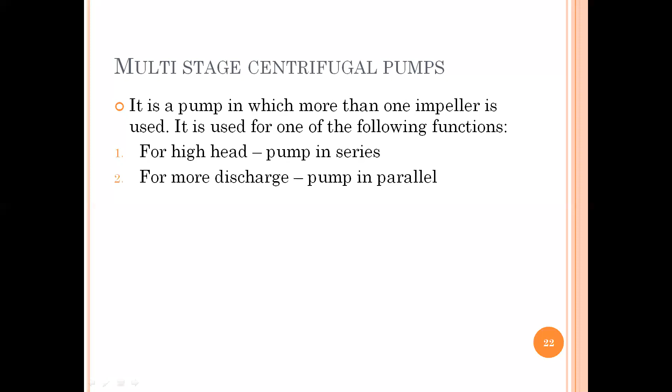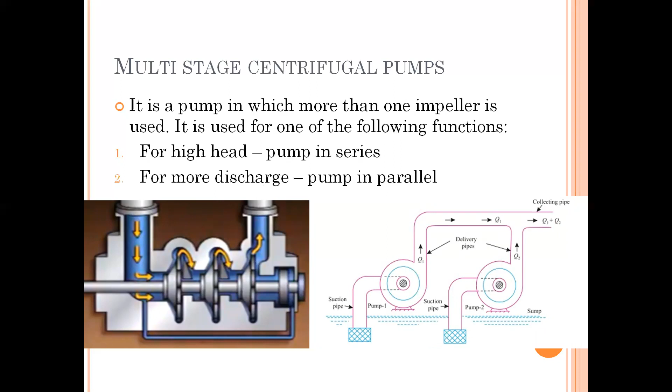It is connected in parallel. So this is discharging Q1, this is discharging Q2. So combining together, I'm increasing the discharge which is coming through the pipe to the delivery pipe. So these are the two types. And again, diagrams are important to draw whenever multi-stage pumps are asked.

Now the second thing we're going to do today is the specific speed of a centrifugal pump. We didn't have a derivation in turbines, but here we have a small derivation based on proportionality. Now what is the specific speed of a centrifugal pump? In simple terms, it is the speed of a geometrically similar pump which would deliver 1 meter cube per second of liquid against a head of 1 meter.

Now in turbines, we had calculated the specific speed. Depending on the value of the specific speed, we can say which turbine can be preferred. Here it's only one single unit. We need to calculate the specific speed for design purposes. Say I have to lift till 10 floors. So based on the requirement, I design my pump. You have your normal half HP, 1 HP, etc. But depending on the variation, I should know what speed can be delivered by the pump.

Now here I'll assume certain things. Let capital Q be the discharge, D the diameter of the impeller, B the width of the impeller, VF the velocity of flow, U the velocity of the impeller, N the speed of the impeller, and HM the manometric head. I have not mentioned section 1 and 2. I have not mentioned D1, B1, VF1. I've just taken the general formulas.

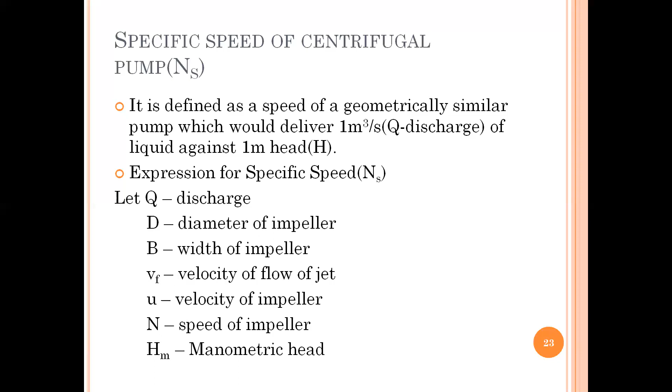Now, the first equation is Q is equal to pi B D VF. Section 1 and section 2 are both the same, so I'm using 1. So I can say that Q is proportional to B D VF. And your width and diameter are proportional. As the diameter increases, the width also increases. So I can write width is proportional to diameter. Taking this into consideration, Q is proportional to D square VF. This is my first equation.

And the second equation I know is U is equal to pi D N by 60. Again, I'm not taking section 1, section 2; I'm just writing a general equation of U. So U is proportional to D into N. Let this be the second equation. Now again, the standard formula for Francis turbine, Kaplan turbine, as well as your centrifugal pump.

Your U is speed ratio into root 2gHm. Hm here is the manometric head. So taking that into consideration, I can write U is proportional to root of Hm. Similarly, Vf is equal to flow ratio into root 2gHm. I can write Vf is proportional to root of Hm.

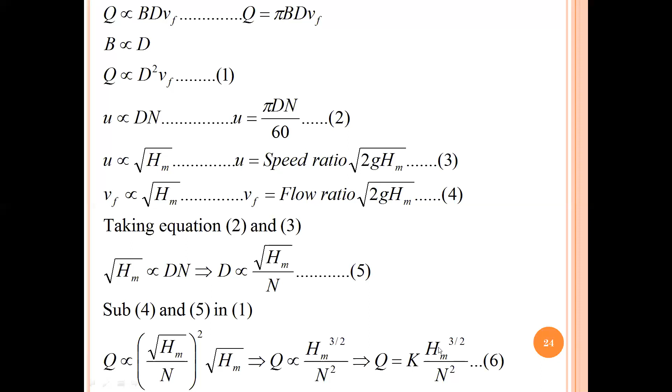I define my specific speed considering 1 meter head. For 1 meter head, the discharge is 1 meter cube per second. So I'll substitute this to get the value of K. In the equation Q is equal to K Hm to the power 3/2 by N square, I'm substituting 1 here and 1 here. So I'll be getting 1 is equal to K by Ns square. Here N becomes Ns, and Ns is your specific speed. I can get K is equal to Ns square.

Now I substitute this in my equation 6. I'll be getting Q is equal to Ns square into Hm to the power 3/2 divided by N square. So I have found out the proportionality constant, K is equal to Ns square, and then I'm substituting and simplifying to write in terms of specific speed. I'll be getting Ns is equal to N into root of Q divided by Hm to the power 3/4. It was 3/2; when I take root, it becomes 3/4. So this is my specific speed of a centrifugal pump.

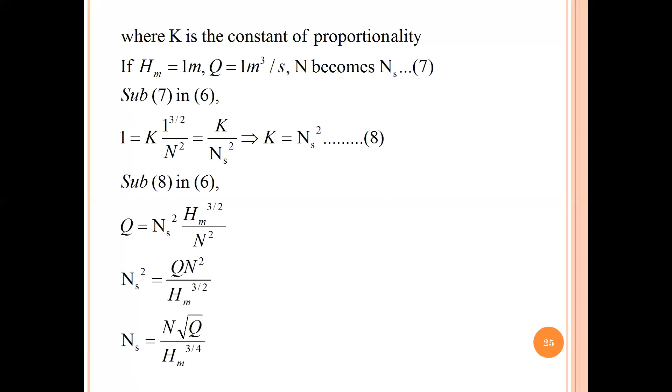Now next, I had mentioned priming a number of times. Priming is basically introducing water to your pump before you start the motor. We fill the suction pipe, the entire casing of the pump, and a portion of the delivery pipe up to the delivery valve. Once it's filled, then you switch on the motor. If you're using the pump for water, you have to introduce water. If you're using it for milk, you should introduce milk. Whatever fluid has to be lifted up, the same fluid should be used for priming.

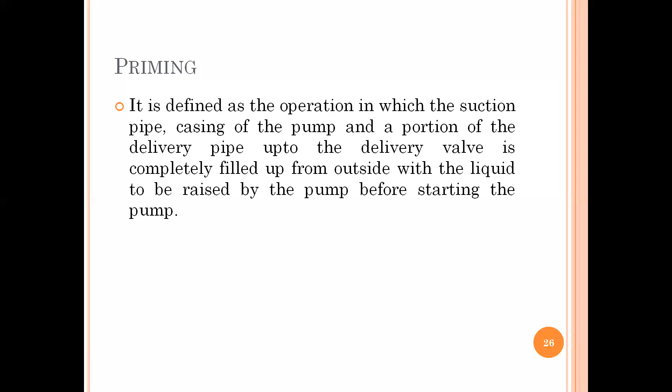Remember, in a new pump, priming is not required every day, but frequently. But as my pump gets older, it becomes mandatory that I prime it daily for better efficiency. Otherwise, if you don't prime it, air will be rotating, and because of air rotation, you can't lift up your liquid from below.

The next thing I'm going to discuss is cavitation. As the water flows with rotational motion through your pump, it erodes the metallic surfaces, and that erosion is called pitting. Why is it happening? From your earlier physics, you know that the boiling point of water is 100 degrees Celsius, but at reduced pressure, boiling starts early. If I reduce my pressure, the temperature at which your liquid starts to boil also reduces. So when the boiling point is reduced, vapor starts forming easily.

Your best example is the pressure cooker. In your pressure cooker, boiling takes place faster because it is closed and pressure is generated due to the heat. The same phenomenon applies here: when water passes through your pump, the pressure gets reduced, so the boiling point of water also decreases, and it starts forming vapors very fast. When these vapors come into a region of high pressure, they collapse, causing erosion of your metallic surfaces. Such an action is called cavitation.